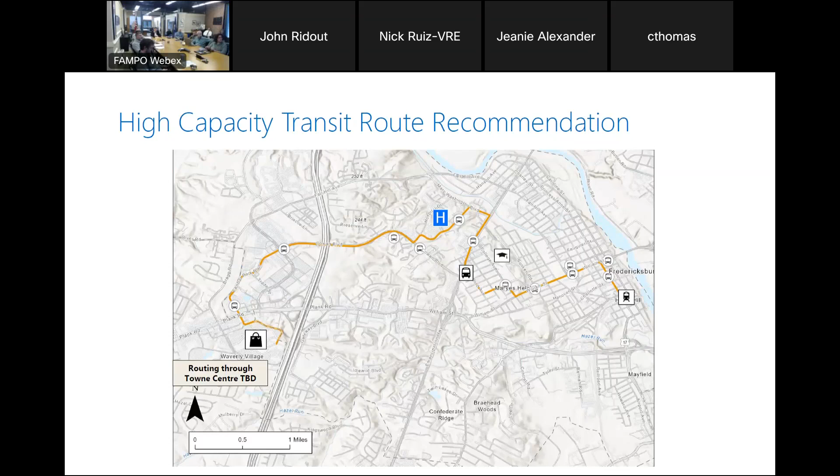We're retaining, as a high capacity transit route, certain elements of a higher quality transit option. That includes signal priority, which gives the bus the ability to change the light timings to get a little more throughput. Right at this intersection with Carl D. Silver, we actually have a queue jump, a little widening to allow that bus to get to the front of the queue, jump the queue as it were. Not very popular in Britain to jump queues, but very popular among bus rapid transit to advance buses through this intersection and make their way through.

That's the update, the recommendation that's going to be put forward in the final transit report, consistent with the conversations we've had over the last few weeks. Are there any questions on this recommendation before we dive into the roadway piece?

The big change is the removal of the section on Route 3. Correct, we're no longer having a bus like this high capacity transit on Route 3. There was some opposition to doing that at this stage, so for now, this is the proposed route.

At this stage, have y'all done any feasibility or engineering to see what might be feasible for the queue jumps right-of-way and stuff? I know that specific road, I drive it almost daily, it is very small. Yeah, so I think we would likely be looking at right-of-way impacts in that location.

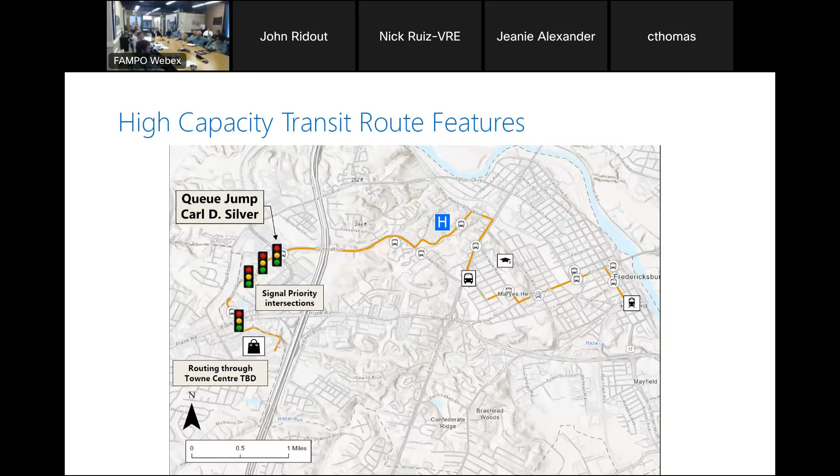I think we'll, I like that.

Stafford representatives, both on the TAC and the policy committee, have also suggested a slightly amended bike route to connect downtown Stafford with the VRE station, as Drew mentioned earlier. But we've only just gotten that, kind of Friday-ish, so it's not yet on the screen, but they're working on an updated version of the routing of that bike path. The other piece of the transit report, which will go live for the TAC agenda next Wednesday, covers the transit-serving bicycle and pedestrian projects, where the largest change is access through Stafford. We're glad there seems to be an aligned approach to make that happen, and we'll incorporate them.

All right, so on to the roadway report. Speaking of the pedestrian and bicycle pieces, there's also roadway, pedestrian and bicycle projects in the report. Since we went through them predominantly last time we got together, and also had conversations with the pedestrian bicycle committee, we're going to focus on the roadway pieces here. But since we're in the sequence leading up to policy committee at the end of November, if there's any comment or feedback on the bicycle and pedestrian projects in the roadway report, we're still taking them.

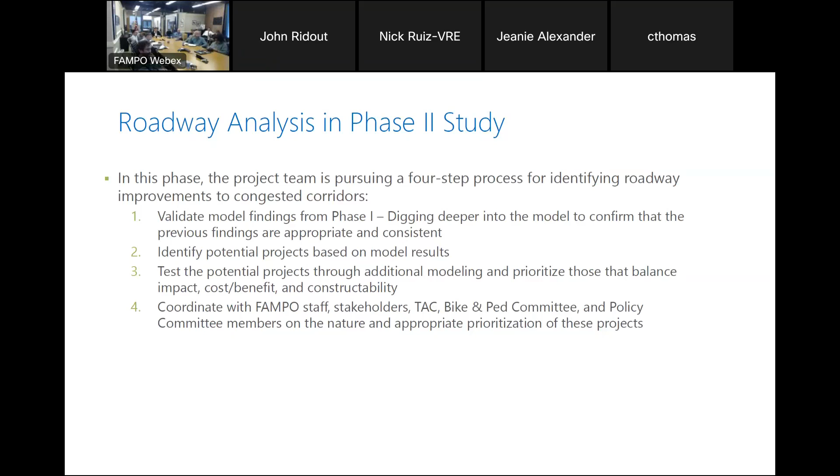So when we're talking about congestion in 2050, severe and extreme are the two criteria we use, shown in orange and dark red. Severe is for arterials, which is generally where we're looking, even though we also have a criterion for collector and local roads, and that's when the volume to capacity ratio—how much traffic is moving through versus how much capacity we have—gets above 0.89. That's when we get into severe levels and look at making improvements.

Above 1, when the system is over capacity, you're going to see larger queues, more delay, greater challenges in the overall transportation system. But any system, as it approaches capacity, begins to experience some of those challenges as well, which is why we start at 0.89 versus at 1.

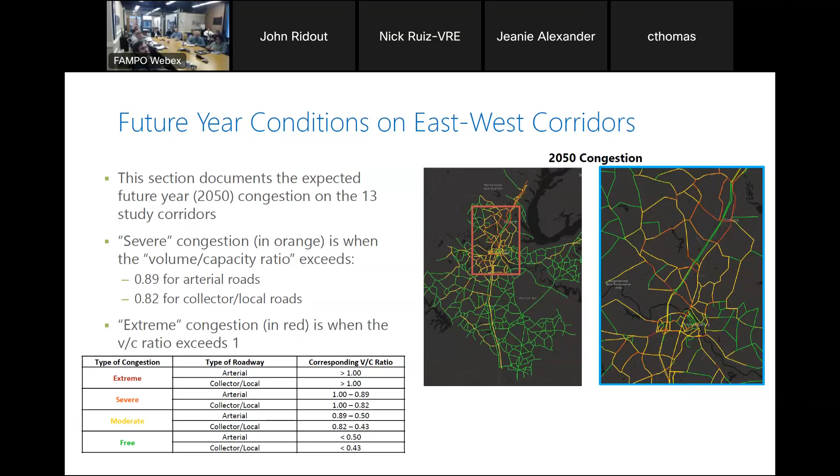So when we look at future traffic conditions in our corridors, we have these focus study areas where, based on the phase 1 analysis, these were the segments of the corridors that appeared to have the congestion and that were logical within that section of the corridor—they didn't just stop halfway down before a major tie-in to another route.

So when we look in those areas, the main metric we're using in this report is average peak V/C ratio. It's the same metric used in phase 1, which is basically, within that corridor, the average peak of the volume to capacity ratio—so what's the average intensity of high volume travel?

So overall, some of the key highlights: where do we see this congestion? Where a lot of auto-oriented retail, commercial mixes, in particular with I-95 related activity—that's where some of our biggest challenges are. It's also a place where a lot of the traffic operations story that isn't necessarily captured in this model also happens and influences overall traffic operations.

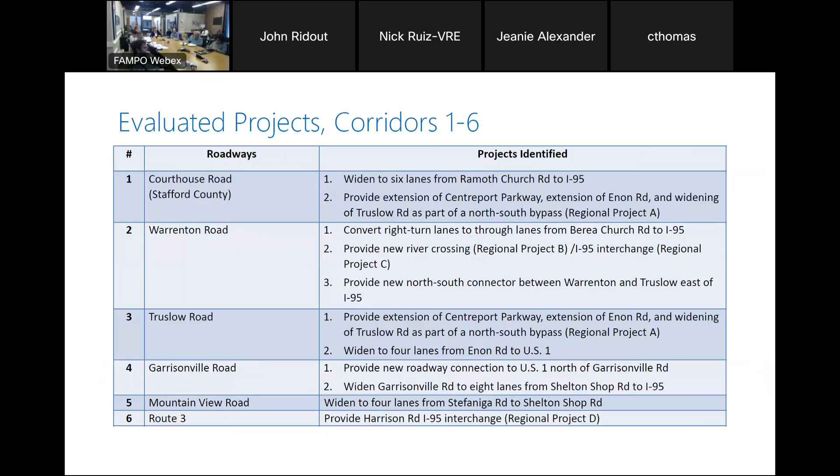So we'll start with the regional projects that I mentioned. Those are the ones that seem to have an influence beyond just the specific corridor. And then we'll look at some of the corridor specific projects.

So when we're looking at the recommendations about how I went from that list to the recommended corridors we're looking at, the main first metric is congestion impact. But then we're looking at implementation and cost considerations. In the report, we have cost estimates. Those are very high level, planning level cost estimates, and they don't have all of the nuts and bolts of ultimate implementation - property, design costs, environmental compliance costs, particularly for the larger ones - and then escalation over time. If a project happens in 2040 versus 2050 versus 2060, that can have a big influence on cost.

And so we'll show both a regional congestion metric - this is throughout the FAMPO area, how do congested conditions change - and then specific corridors. You'll see the regional projects tend to have that regional benefit, whereas the corridor projects tend to have pretty minor regional benefits in terms of reducing large-scale congestion in the region, but tend to do well reducing congestion in that corridor.

So if you read the report, one project we looked at was a potential new roadway across from north of Garrisonville Road, sort of in Stafford Borough, over 95 to Route 1, to try to see if we could deal with some of the complexity there - just a lot of stuff in the way to get from there to there. So that's an example of a project that, from an implementation standpoint, was eliminated at this time.

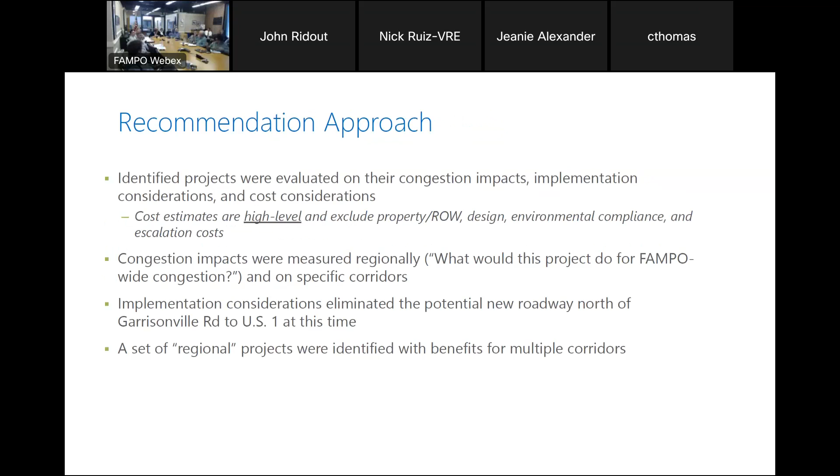No, I think it means they're coming home at different times. No, these are daily volumes, not related to peak hour. That's 10,000 more people eastbound. The implication is that if that's factual, you could add a lane just to the eastbound direction and solve the problem, but it seems odd it could be that big a divergence.

I definitely understand that comment, so we'll take a look at what's going on there. To the question of art and science versus the model, we understand where the model gets us and what some of the limitations can be in terms of the model result, but we understand that comment and we'll take a look for sure.

I had one too - if it's valid, they're all going home a different way. Yeah, we don't know where that is. That scares us.

Getting back to what's included in the no-build, we're talking about 2050, so there are other projects already in the constrained long range plan that might provide that alternate route. Is it the interchange - is that in the long range plan already? Harrison is already in there. But this is Garrisonville - wait, we're up to Stafford. Oh, okay, there wouldn't be any additional access.

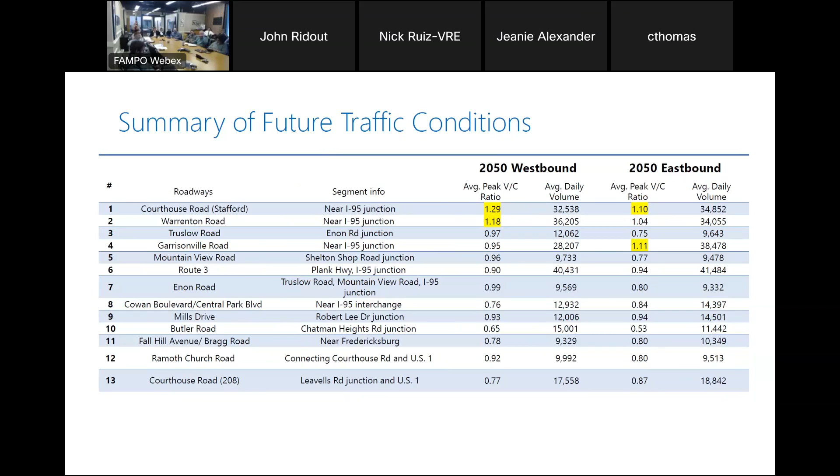All right, so we'll flag that, but yes, this is fun with the traffic data that can go on forever. So we'll dive into - we were starting to talk through the recommended regional projects.

These are the ones where we see a larger impact and they have that benefit, and they bring a larger set of costs and policy questions and impacts in their own right. The four we are flagging here: a new Western network with new connections on the west side of I-95, relatively close to 95, to fill in that road network there. We'll also talk about a new crossing of the Rappahannock, a new interchange on the north side of Fredericksburg, and the Harrison Road interchange.

That new Western network brought together three individual projects we had been looking at: a connector from Centreport up to Courthouse, a connection from Enon to Centreport, and possibly using Plantation as that sort of connector. There's also a widening of Truslow, which has a challenge - the bridge over 95 wouldn't accommodate that widening, so this would definitely be a longer time horizon in terms of ultimate implementation.

As I mentioned, our goal in looking at this is to evaluate the regional impacts and then the corridor impacts.

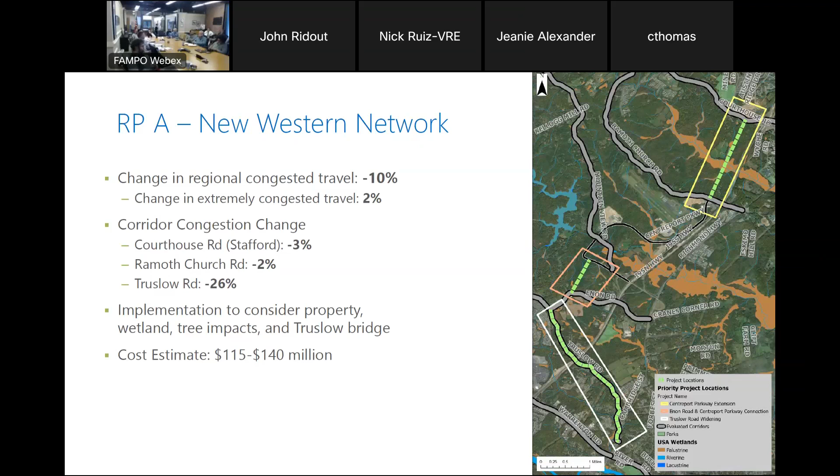Some of these projects have been around for a number of years. Not new ideas. New interchanges and in between that's been studied just a couple times. This is another good idea.

Part of that answer is that we specifically asked them in the brief at the beginning to look at the two I-95 interchanges that have been proposed in the past and do an updated modeling exercise to tell us whether what has been done 10 years ago is going to give us the same outputs now in terms of the model. Remember, you've built bridges on the I-95 since that last study of I-95 interchanges.

But there was some time back. So we just asked them to do an analysis of those two interchanges. I'm not speaking now of the bridge over the river, just talking about the two potential interchanges on the I-95, specific for the consultant to look at them again. The river crossing they came up with, that's not part of the original brief. Right, and the interchange to the 17 has some challenges there. So is that taken into account?

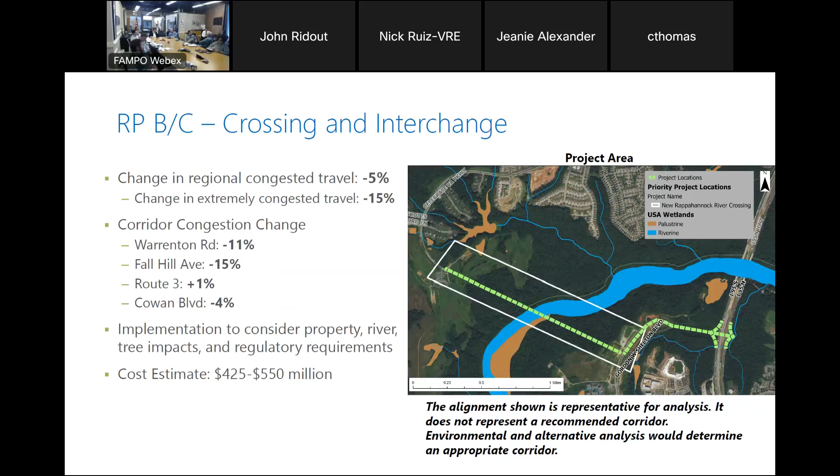And so you're assuming that in the comp plan. That's in the CLRP, the traffic sort of analysis, that traffic burden of... Well, so Harrison Road's widening is assumed in FAMPO's constrained long range plan, so we take that for this exercise as a given. And so then I would say that without that, you wouldn't be able to implement this, because you would be funneling traffic through a corridor that wouldn't be able to handle it.

So the presumption is based on what's in the CLRP. That's sort of our baseline that we build off.

I think the larger question you're getting to is why these projects now, that have been around in these conversations. I think one of the challenges we face, particularly in the major east-west arterials, and particularly given where the concentration of land use is - the land use that the region wants to continue to build on, to improve, to make higher quality - that geographic reality is a fundamental operational and management constraint, in that you have a huge amount of your demand very close to very active regional routes that people want to get through.

And so these things pop up because they give us an opportunity to think through a larger network here, versus funneling stuff through corridors that just fundamentally, because of where stuff is and where we want stuff to be, will always hit that impasse. And we know a lot of that's operational that we don't even totally see within this model.

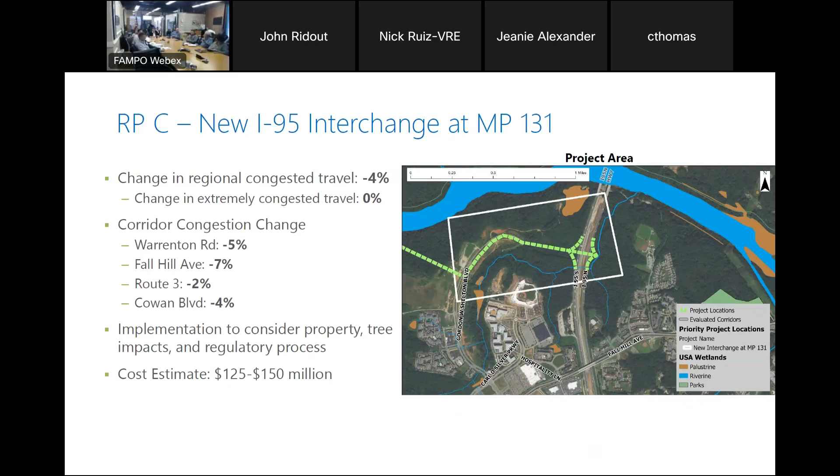If you want to jump back to just a B — sure thing, several questions on this. In terms of what's already coded in the model for the 2015 or 2019 runs versus 2050, I'd be interested in seeing how the existing CD lanes that have partially been built and are already under construction for southbound and northbound river crossing projects impact this area, in the same context for regional congestion travel and extreme congestion travel.

I think this was one option, but it was the chosen option for how to fix this issue several years ago — building two new bridges there instead of building bridges in an area where you would then hurt the environment.

Those model runs, to answer that — first of all, they're not part of the study, not part of the scope. But VDOT has already done that when they built the bridges; they did a model run to determine what the impact would be. So we'd ask VDOT for those — it'd be a different type of data than what's in here.

I guess you probably ran a build or no-build model in 2019 to compare values to, since that's where you're getting the minus 10%. Yeah, basically we have our no-build, and a 2035 and a 2050. Our no-build is the FAMPO build scenario for those years. So you didn't run anything for 2019? Just some calibration using that.

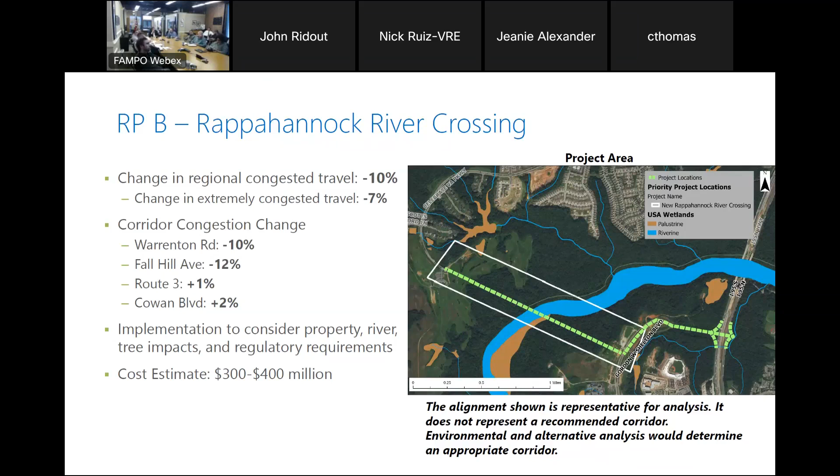Steven, I had a question about item D. I just wanted to, and it was good that Matthew kind of opened this up. I think the cost on this one, maybe you've thought about it, needs to include extension of the CD system to that interchange.

Well, I really don't know that we'll see any new interchanges in this area that don't connect to it. Now, the one up at the rest area, there's already going to be a CD system there to tie into. But this one would probably have to have that extension in all likelihood. I think you should probably back me up on that. Yeah, so we should include that cost.

The Secretary of Transportation doesn't want to give us those lanes. He told us we're going to have flying cars by 2050, so we can't keep screaming for another lane and another lane. If that's the case, he doesn't want to give us another lane, that's the whole direction of this study. He said that in a public meeting. You were there actually when he answered that question, and he said, oh, all you want is another lane on the I-95, and you can't always get another lane on the I-95. That's just for reference.

As well, the existing fourth lane connection with CD to the main line is probably just north of that white box, so it comes pretty close already. Yeah, we'll check. I would say the cost estimates are informed by interacting with CD, but in terms of assuming the improvements, I think that's going to jack up the cost. These CD improvements probably are still being constructed in 2050 because they weren't built by 2019 when the model was built in the first place. So yeah, we did take a look at that since it's so impactful in the overall system, but in terms of this interplay, that will inform our ultimate cost estimate.

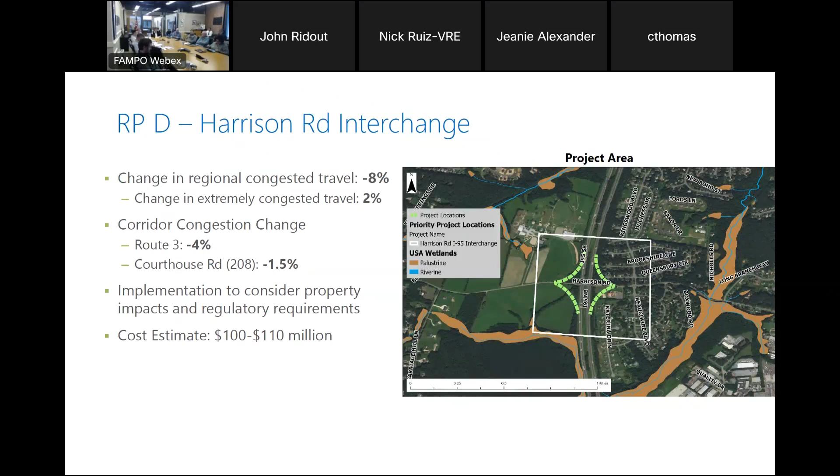Okay, so now we're going to move to the corridor projects. This was speaking to some of the places where we might see regional benefits from a corridor project. Looking at the system turn lanes in this area converting to through lanes, we see some actually pretty good regional benefit, some decent corridor benefit, and it's a relatively low cost project.

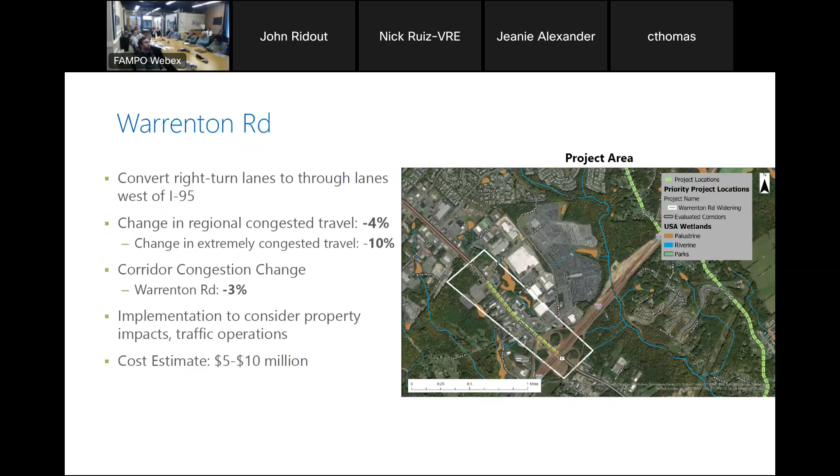Just really quickly, did we skip back 2, Courthouse Road? Oh, we did - thank you. I was looking at my slide, I was off on the clicker.

We see in terms of widening to 6 lanes, very much like section 95 - is this one of the regionals? This is a corridor project. Yep, sorry, no worries. So we've got a 5% reduction, and then you can see about a 7% reduction in Courthouse Road congestion within the studied area.

Just emphasis on, we now go from 6 lanes to 2 lanes towards Shelton Shop. So I don't know from a traffic perspective if that makes sense. I don't know how the model is taking that into account. It may not be, and that might be microsimulation that needs to be taken care of, but it just doesn't make sense to me.

I think one of the things we note really in one place in the report, but we can be clear on, is there's a gap between the modeled outcome of the project and the transportation logic of a project. Yes, to your point, we don't see congestion on the far western end of the corridor even after the widening. But would there be a logical way to move to that transition based on flows, based on overall staging of how you would implement the project?

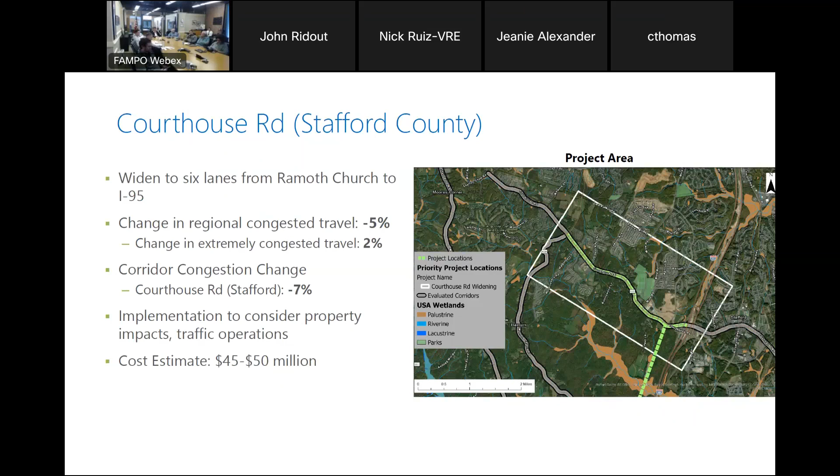So Garrisonville Road, this has pretty limited regional impacts to do widening to 8 lanes in this area. It does have pretty strong impacts on the corridor itself. These corridor projects, whenever you're talking about widening a corridor, raise the types of impacts of property impacts, access impacts, and consideration of what a wider road does in terms of business and economic success, as well as pedestrian crossing and timing. Those are the sort of issues that emerge consistently in widenings, and the amount of impact varies based on the corridor.

This is one of those cases that speaks to my overall point about the fact that Stafford's road network has got some severe network challenges. When you look at this, we're talking about widening to 8 lanes, which is kind of almost unthinkable, but because the congestion there is severe, you've got to do something about it. What you do about it, in this case, is widen the road. But I remain convinced that the overall network limitations in Stafford produce this kind of need. If the network as a whole were better developed, you might not have needed to put 8 lanes on this particular road, because you'd have different alternative ways to get somewhere.

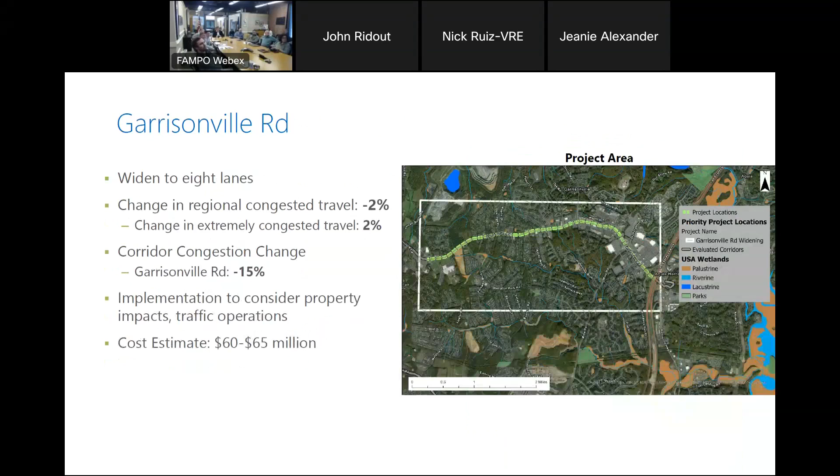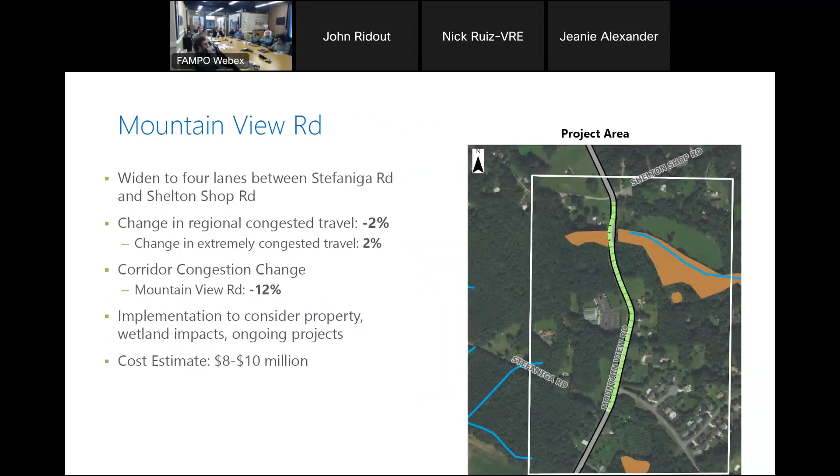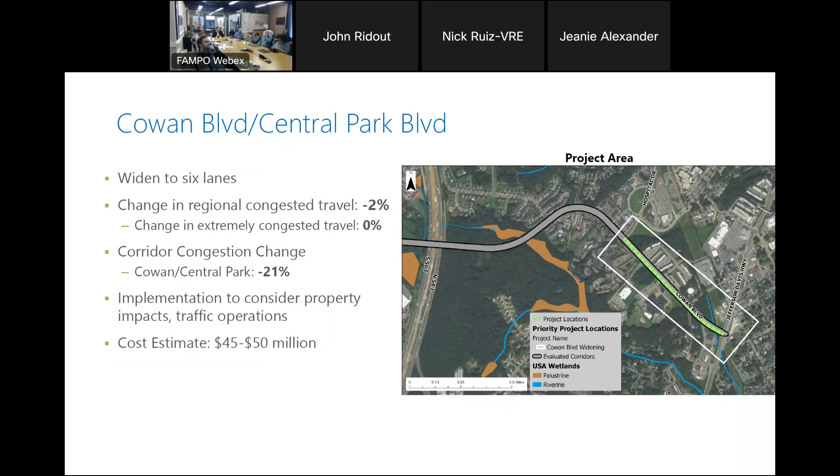Well, I think in the interest of time and the larger conversation, as we go into these smaller ones - not all smaller, but here's the approach: the Shelton shop, again, for what we generally see with Mountain View Road, are minimal impact on the regional, some positive impacts on the local corridor congestion. And we've heard the comment, we need to update this map moving forward in terms of exactly where our project extent is. But focusing on some of the approach into Route 1 in terms of the widening there. And then we do see the benefit, and I think as folks understand, when you have a severe but not extreme congestion and you widen, you get big decreases in overall V over C ratio because you've opened up the capacity in the corridor.

Mills Drive, to talk about a project that has some benefits across different modes. So this is US 17 approaching the VRE station. We see pretty good benefits there. We talked a little bit about what the CLRP assumes in terms of the corridor, and this would tie into one of our pedestrian bicycle projects, providing some co-benefits as well as improving access to the VRE station.

Do you have a comment? So it connects to two of the bike ped projects, correct - the Benchmark and 17 corridor? And my understanding was kind of that the goal was the connectivity between Germanna Community College and over to the train VRE station. My question is, and I know I heard CLRP, but you had stated what we had was up to Hospital Boulevard only, correct, as far as the 4 laning?

So my question is, we show 4 laning here from Massaponax Church to Benchmark, but we have a 2 lane from Massaponax to Hospital Boulevard. Why was that not 4 laned as well? Our comp plan - are we creating a pinch point there? Because you have Route 1 corridor out west, you have Hospital Boulevard out west, you have the Germanna Point Connector Road out west up through the hospital, which effectively creates a parallel road to Route 1 from Lafayette Boulevard all the way down to the hospital. Should we not also extend that to the same reach of the bike ped project? And I know that comment was maybe raised at policy committee.

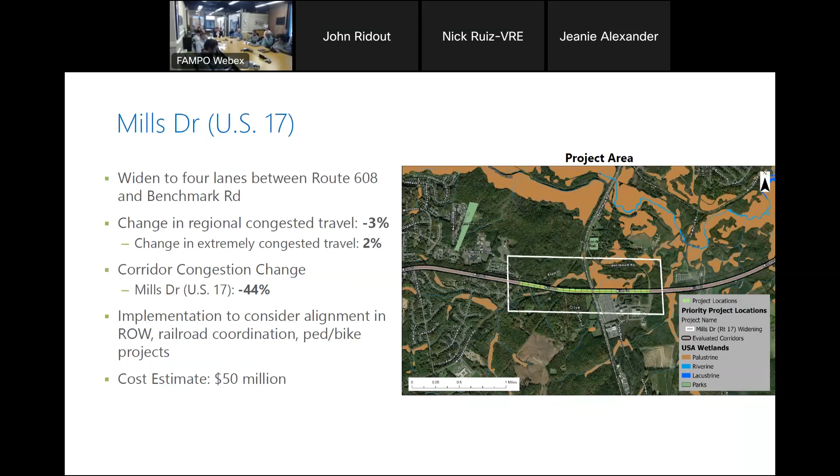And of course, it's a question of money too. I mean, we can recommend four laning that whole thing all the way to the other end, but then it's a several hundred million dollar project.

I just know our concern, talking with our transportation staff, is what is going on to the west. We're now seeing industrial parks being proposed, multi-million square feet off Cosner Drive. There's just a lot coming in. There's Alexander's Crossing, thousands of acres, maybe 1,000, 1,200 acres, something like that. It's starting to now develop in phases. So it's just a concern.

Yeah, and I guess the challenge is we try to be consistent with what the model gives us, so as not to say, well, in this place we did this because why. But we do try to flag what we might consider other policy considerations, that even though the model isn't screaming red there, the logic of the transportation planning, the things that local communities are noting is coming and changing, would give some consideration to how you would build this in a consistent, coherent way, even if it's not one where it says severe congestion in 2050. We do need to move on.

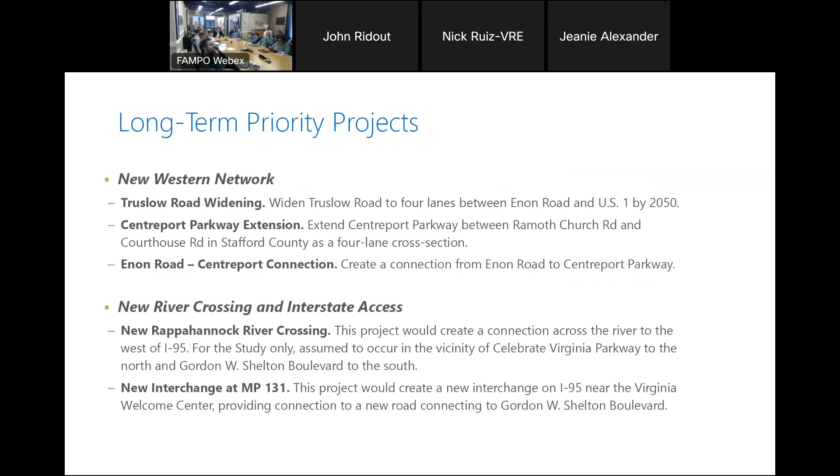Just to close out quickly, we talked about prioritization. We've had a larger conversation about prioritization within the logic of these projects. For the big things, we bundled them, as some folks have mentioned, into a new Western network, tying together the crossing and the interchange, this sort of more traditional arterial, more over here. We can have a discussion about what is harder, what is more challenging. But basically, these projects carry with them large impacts and costs when bundled together, but represent some of that filling in of the grid, the network, and the connections.

When we brought those five things together, we modeled what happens cumulatively. We do receive about a 20% reduction in the congestion and the extreme congestion.

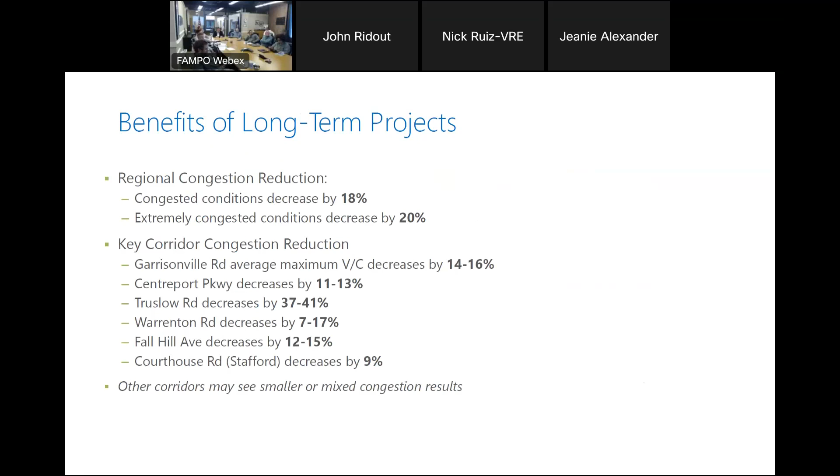And then when you look at the arterial widenings, and folks may have comments about whether these are early implementation, but in terms of being a long corridor where there are existing roads versus charting fully new paths, we identified the four arterial widenings that seemed to have the largest both corridor and then a little bit of regional significance to them: Courthouse, Stafford, Garrisonville, Mills US 17, which has a co-benefit around VRE access, which has some VTrans need associated with it, which may be helpful for applications. And then the Warrenton Road US 17 widening proposal as well, which, as folks have mentioned, is relatively cost effective in its benefit.

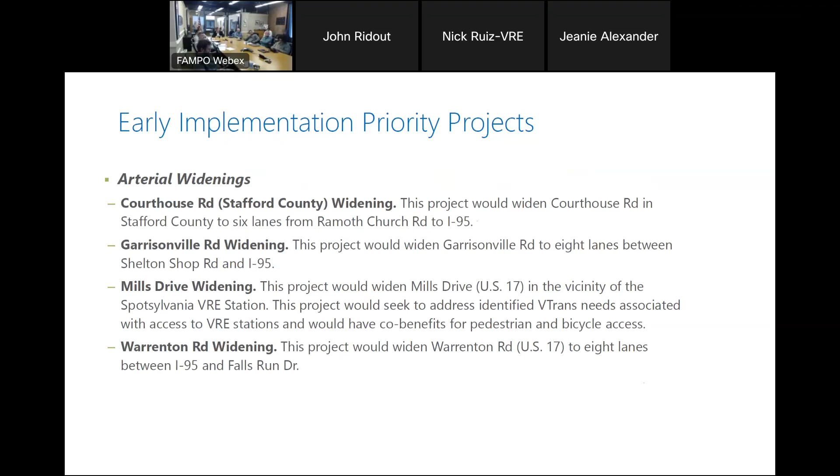So then the other projects we've talked about are really sort of lower priorities based on their overall performance. Based on our prioritization, there's a table where we give scores based on how they do on the traffic. So I think to close, some of the considerations to think through here: one big one is Route 3, which doesn't have a project here. There's some things done on the side, and we saw that there's sort of mixed results overall with what happens with Route 3.

I think our overall goal, because traffic operations are at the heart of the challenge here, closely spaced intersections, lots of auto-oriented retail happening, and Chris is really the expert on Route 3, is that there's a need to take what we ultimately conclude from this study in terms of how roadway movements would shift, and port that back into the Route 3 study to understand the situation there, and then determine what traffic operation strategies can help on that corridor, once we have a sense of how the regional network might shift in response to projects or policies coming out of the study.

Those last few slides are an attempt to give a prioritization to those projects. Where should we start? This is where you start, and these are more long-term projects, and so on. Quickly, on the last slide, a very quick comment.

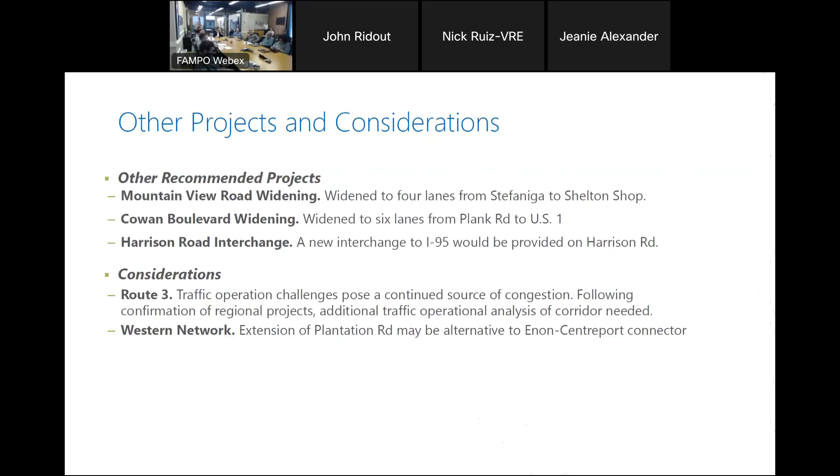Got it. So in terms of next steps, we're in a period where we have this meeting next Monday as the TAC, where we're presenting this basically same content. That's a period of receiving feedback to inform the policy committee meeting at the end of the month, right after Thanksgiving.

And alongside that, we have the final transit report, which is going to TAC next week, and then going to policy committee for approval. So we're in a period right now, particularly on the roadway side, of getting feedback. What you've said already today is very helpful. There are things you want to put in writing and confer with colleagues on, in terms of what, from a staff perspective, represent the key comments in the framing and substance. It's very helpful. Next week we'll be presenting similarly to the TAC on this material, and using that to determine what goes before the policy committee at the end.

Thanks, Drew. You asked me earlier for my opinion, so I'd say one thing about the study and then three things about policy. First, the study was meant not to say you have to build all of these things now. It was meant to come up with a prioritized list of where the crises are, where the longer-term things are, and over time we need to address each of the problems. These are a set of solutions which the jurisdictions then have to discuss and decide whether they want or not, because that's a decision.